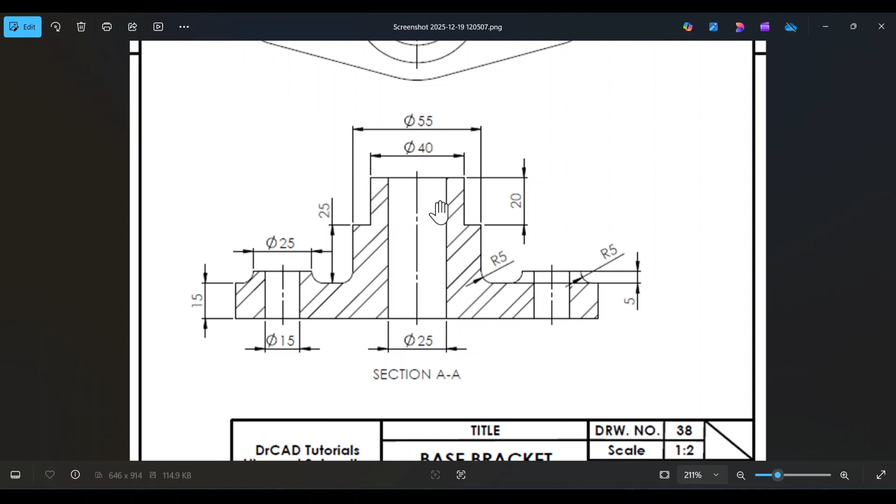Here we see the schematic drawing for exercise number 38. All dimensions are in millimeters. We have the isometric view, the top view, and the section view, and this section view was taken along this horizontal line here, this section A-A.

We have a question, and the question reads: what is the mass of this part in grams? It's telling us to use AISI 1020 steel. When we've completed designing the part, we need to assign a material, and the material is AISI 1020 steel.

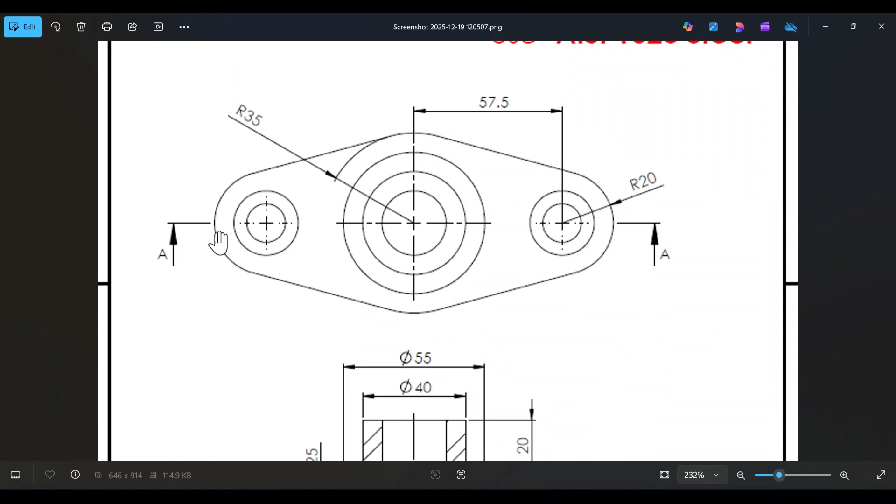Looking at the features for the components, we see that overall it's a relatively simple part to design. We have a base plate - here we see the profile of this base plate. We have a central boss, a stepped central boss. We have two bosses here at the side that correspond to the mounting holes for the component, and we have a central opening running along the center of the component.

Of course, in designing this part, we're going to follow a feature-based approach. Each and every feature that we see for this component, we're going to be implementing within SolidWorks. But for the most part, we're going to be using the sketch tools, namely the line tool, the circle tool, the smart dimension tool, and the trim tool.

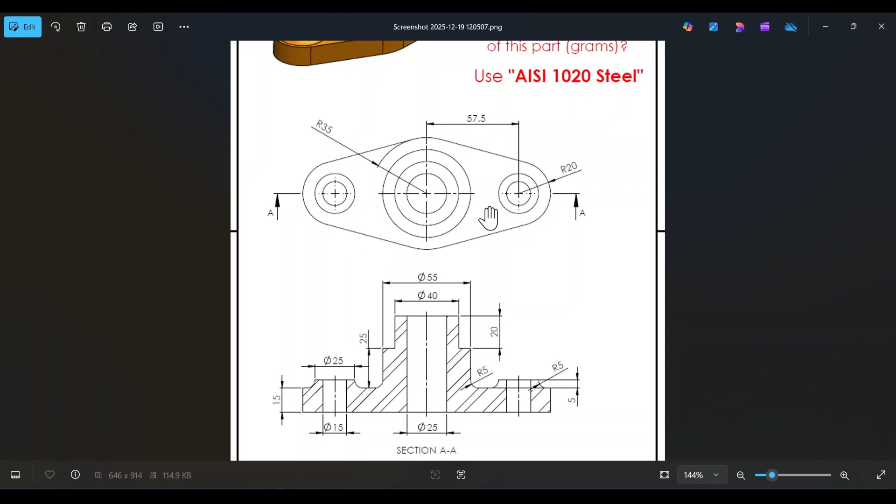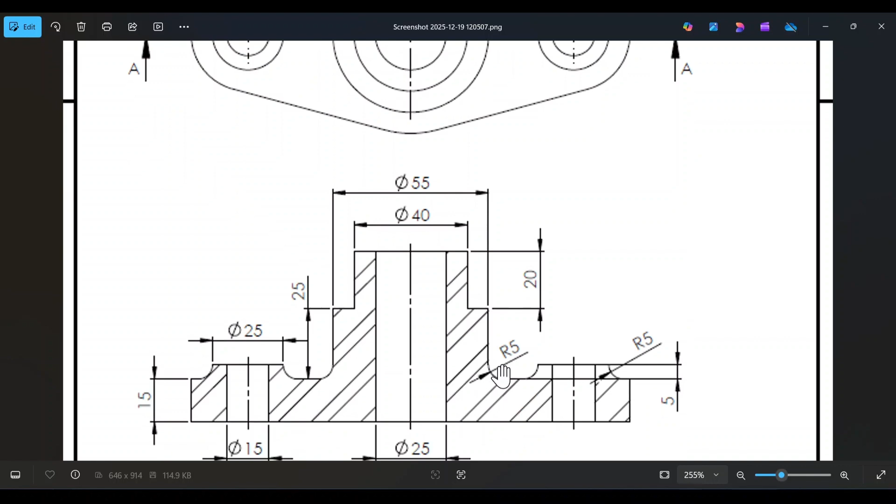Of course, we're also going to be using the extrude boss base tool and the extrude cut tool, but also for certain edges - especially edges right here, 3 edges actually, between the base plate and the bosses that we have here at the top face - we're going to be using the fillet tool to round out certain edges. And the fillet radius here, we see that it's 5 millimeters.

So this is, again, a very, very simple problem within SolidWorks. With that aside, let's get started with exercise number 38.

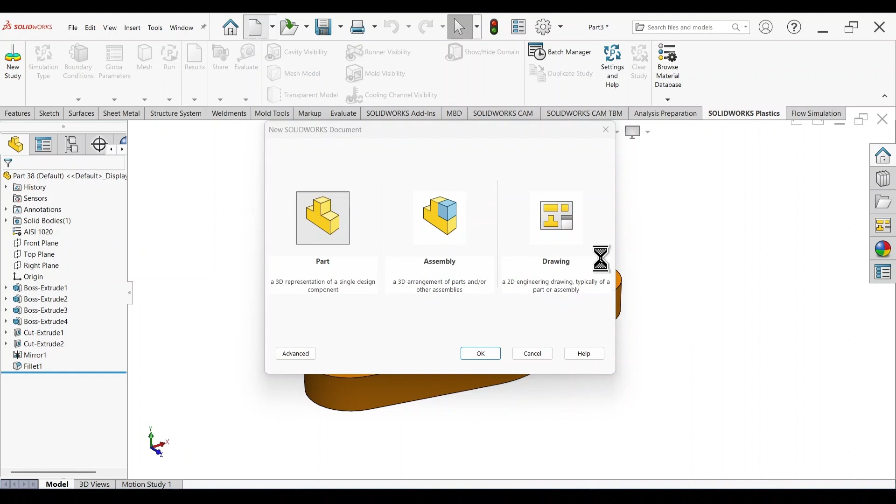Okay, so we start by creating a new SolidWorks part. We set the background to plain white, and we copy exercise number 38 into SolidWorks.

As I said previously, step number 1 involves sketching out the base profile for the component. So very simply, select the top plane, sketch, select circle, and from the origin here, draw a larger circle. Then move and draw a circle to the right of this larger circle. Set the relation between the centers of these two circles as horizontal.

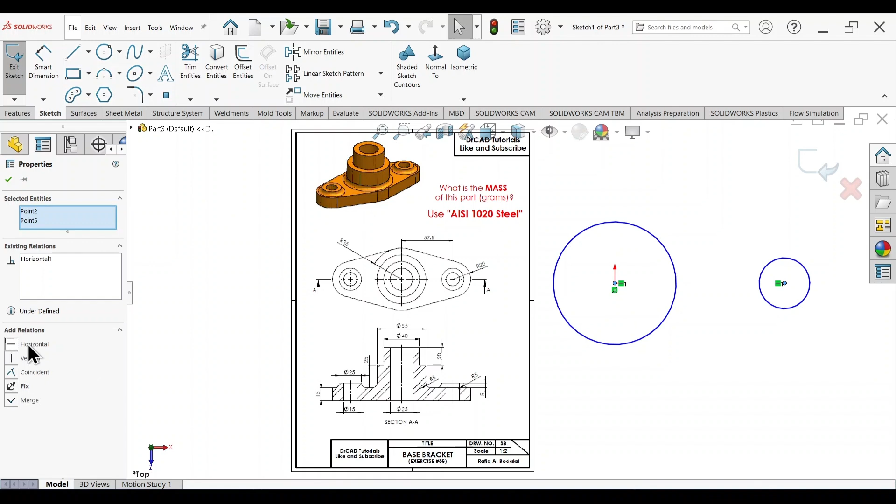Now these two circles, the big circle and the smaller circle here, correspond to what we see here for the base profile. Select smart dimension, and we see that the diameter of this larger circle should be 70, since we have a radius of 35.

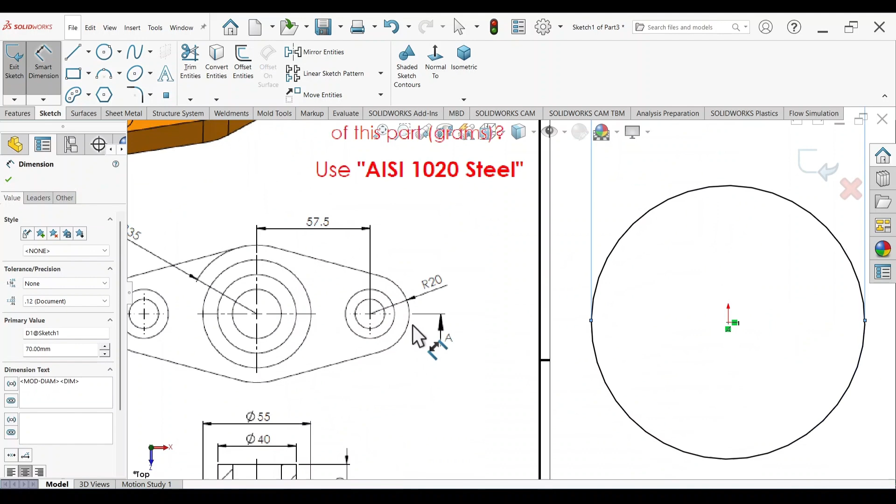So the diameter of this circle should be 70 millimeters, and the diameter of this smaller circle here should be 40 millimeters. The distance between the two circles should be 57.5 - the distance between this point and this point is 57.5.

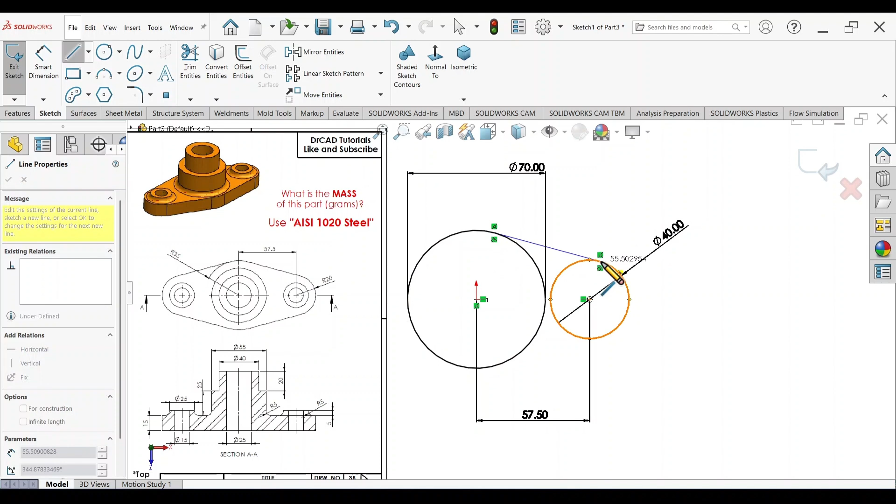Now select line, and very simply just close off the sketch that we created using 2 tangent lines, that's 1 and 2. To make sure that these lines are actually tangent with respect to their circles, we just look at the relation tags, and here we don't have a tangency condition. So select this circle and set the relation as tangent. The rest of the lines are okay.

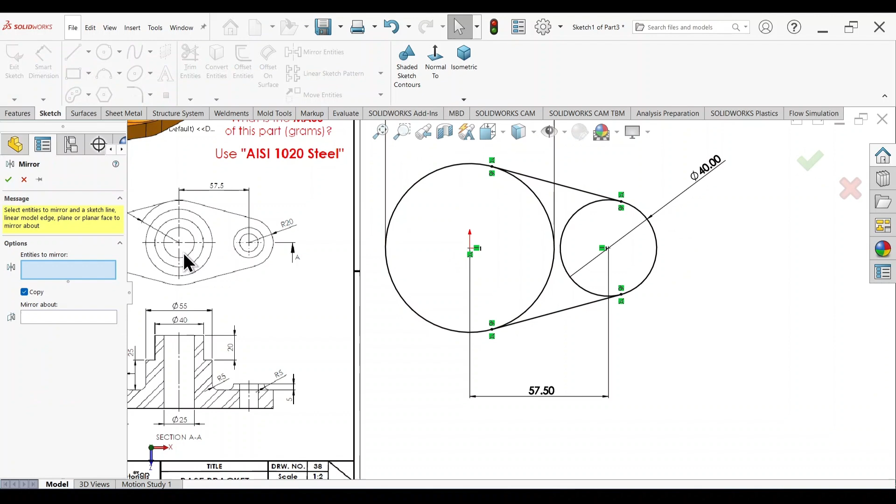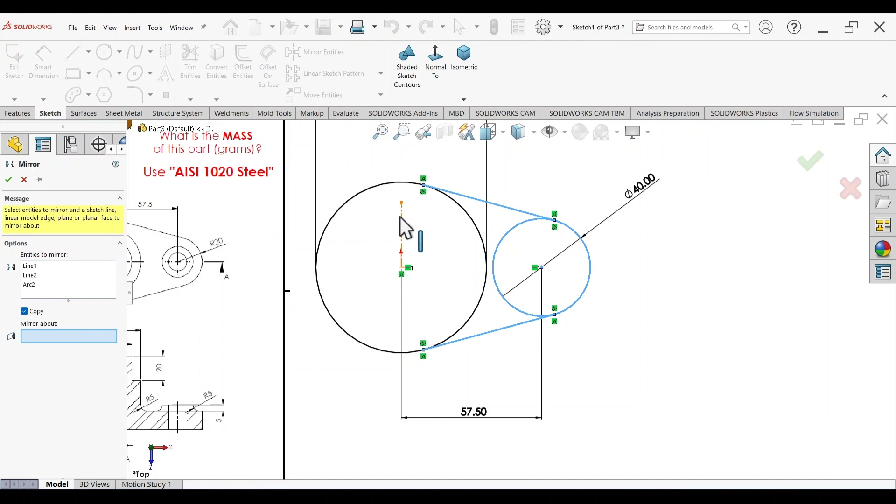Now simply just select mirror entities, and here it's asking for the entities to mirror. Select these 2 lines in addition to the smaller circle here. Or actually before that, first draw a line here, a center line starting from the origin, a vertical center line. Now select mirror entities and select these 2 lines and this circle, mirror about this vertical line that I just created, and then select OK.

Select trim entities and delete any extra lines. And here we have the profile for the base of the component. Now, very simply, just press S on your keyboard, extrude.

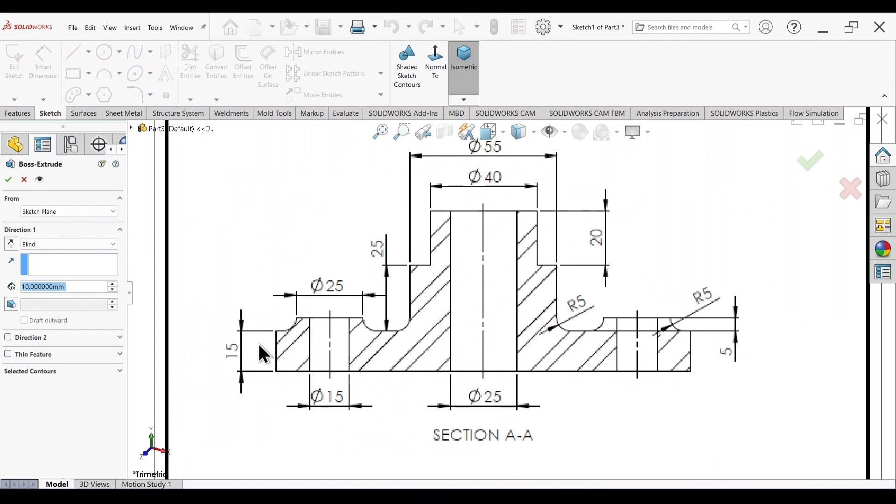According to the figure, we're going to extrude this to a thickness of 15 millimeters, as shown in the section view for the component. So enter a thickness of 15 millimeters and select OK. That creates the base profile for the component.

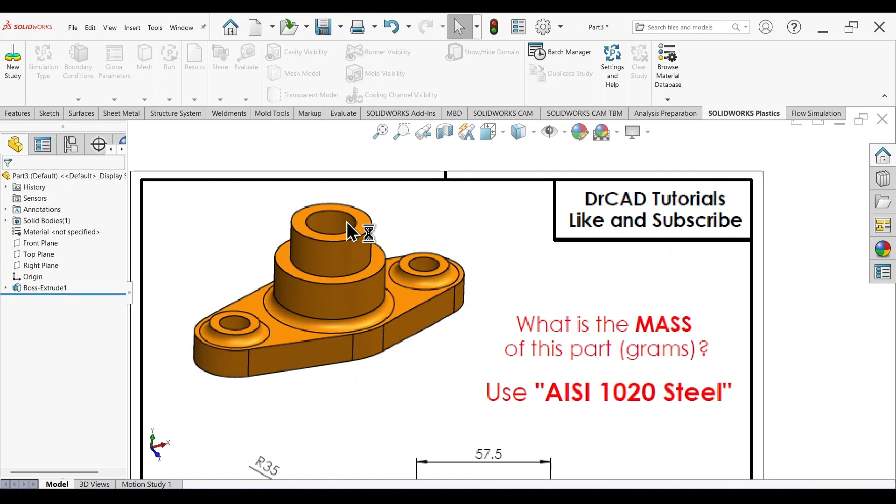Now we're going to work on creating this central boss bracket. We see there are 2 concentric cylinders on top of each other. Select this face, sketch, select circle, and from the origin draw a circle. The base of this larger cylinder should have a diameter of 55 millimeters, so select Smart Dimension and assign a diameter of 55 millimeters.

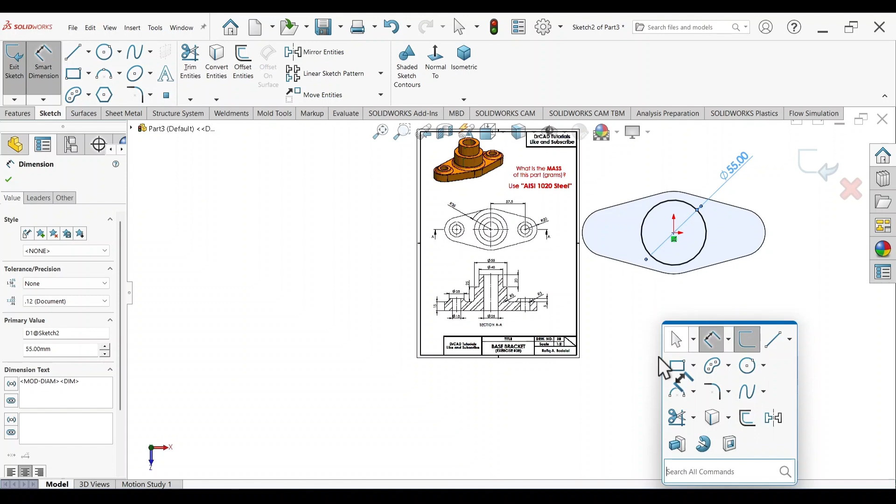Press S on your keyboard, extrude, and the height of this first cylinder, according to the figure, should be 25 millimeters. So this should be extruded to a height of 25 millimeters.

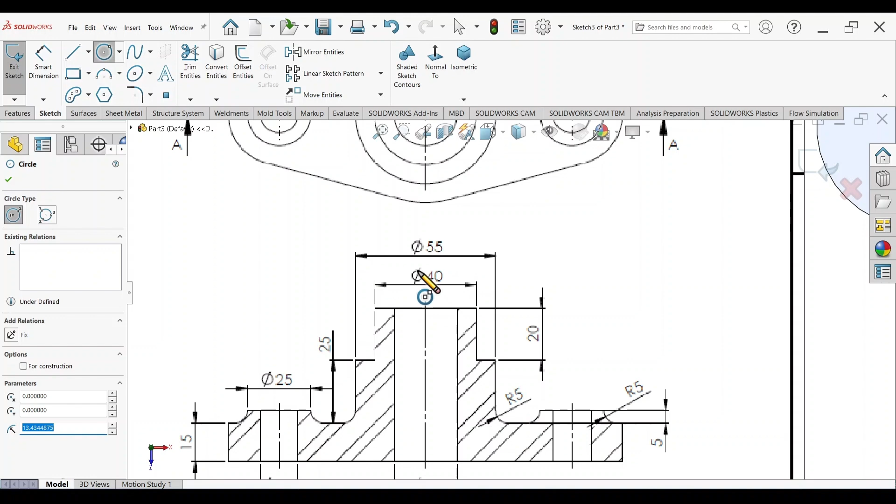Now we're going to work on creating this second cylinder. Select this top face, sketch, select circle, and from the origin again draw a circle. The diameter of this second cylinder should be 40 millimeters, so select Smart Dimension and assign 40 millimeters. Press S on your keyboard, select Smart, Extrude Boss Base, and we're going to extrude this to a height of 20 millimeters.

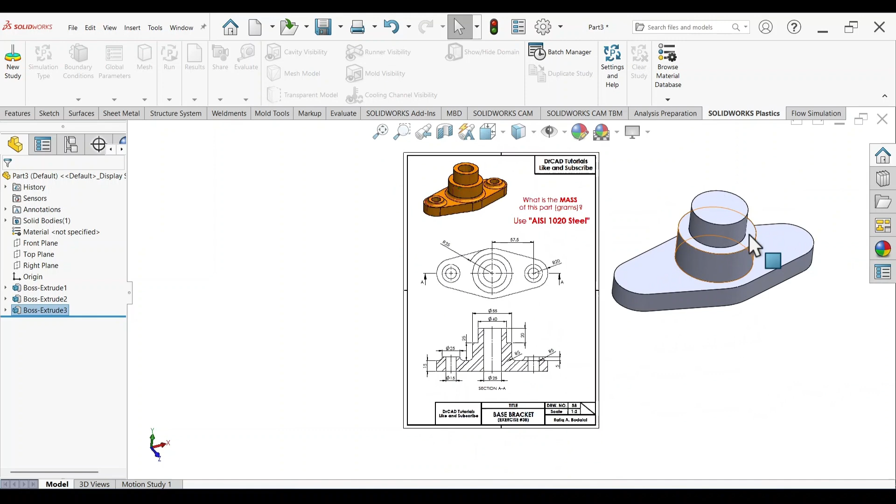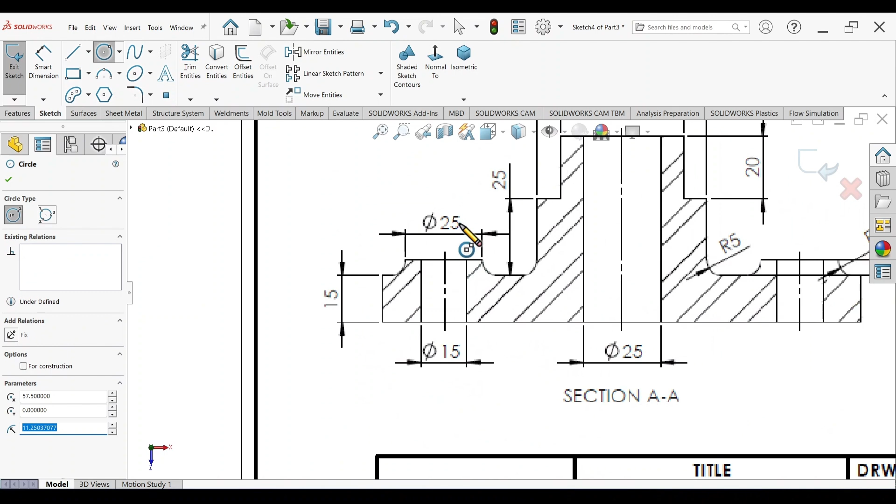That creates the central boss here, the central step boss. Now we're going to work on creating the two bosses for the mounting holes at the two sides. Select this top face, sketch, select circle, and draw two circles, 1 and 2. We see a diameter of 25 millimeters, so assign a diameter for these two circles as 25 millimeters.

Press S on your keyboard, extrude, and we're going to extrude these two circles to a thickness of 5 millimeters, and click OK.

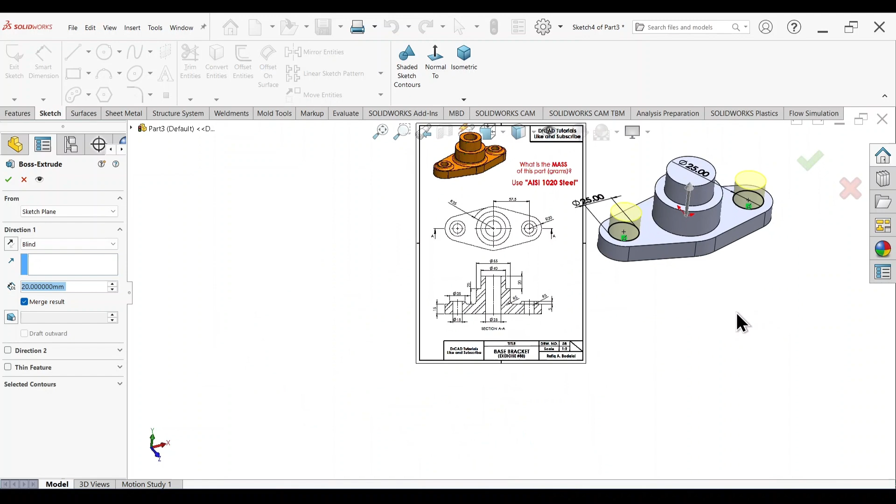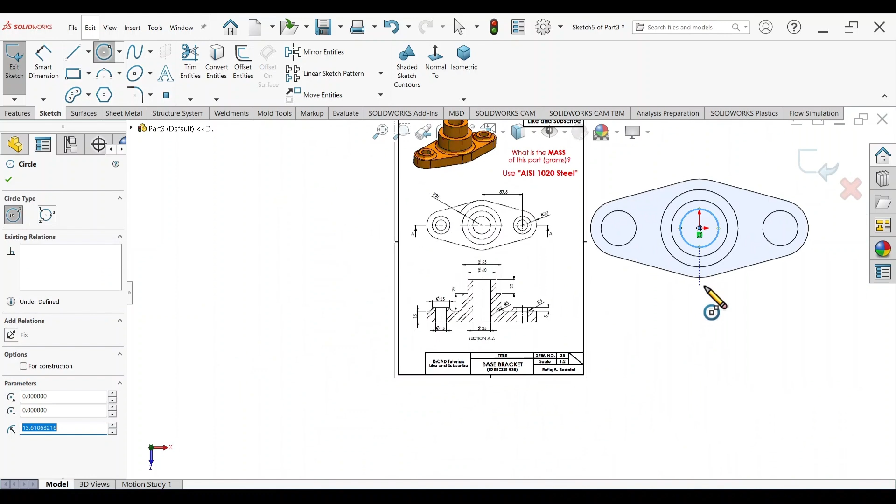Now, very simply, we're going to create the holes for the component. We have two mounting holes to the sides, and a central hole that goes all the way through the component. Select this top face, sketch, select circle, and from the origin draw a circle. The hole should have a diameter of 25 millimeters, so select Smart Dimension and assign a diameter of 25 millimeters.

Press S on your keyboard, select Extrude Cut, set the end condition as through all both directions. You can do that by clicking on this drop-down menu, or to save time, right-click on your mouse and select through all both directions, then select OK.

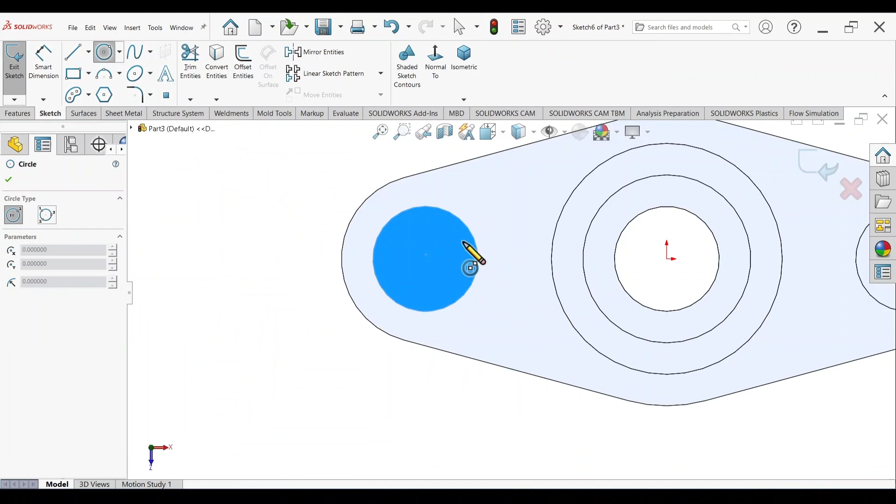Repeat the same process here. Select this face, sketch, draw a circle, starting from this center point. The circle should have a diameter of 15 millimeters, so activate the Smart Dimension tool and set this to 15. Press S on your keyboard, Extrude Cut, set the end condition as through all both directions, then select OK.

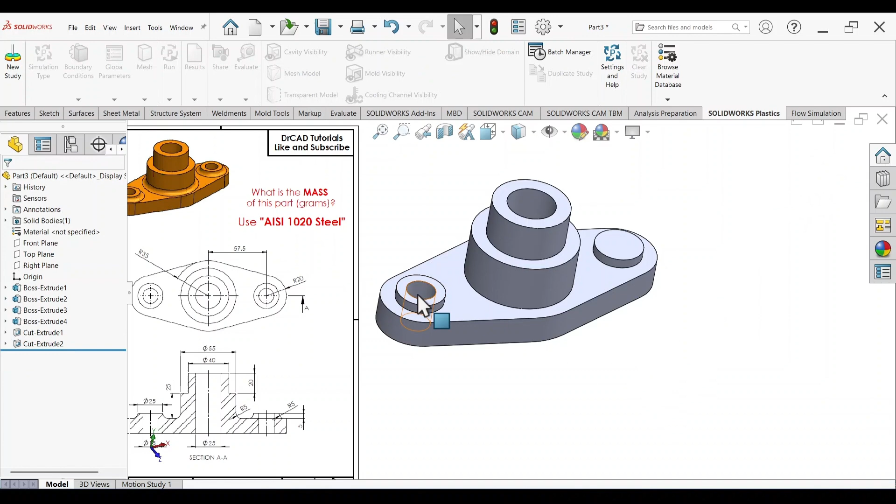Now we need to mirror this to the other side, so go to Features, Mirror, and it's going to ask you for the face or plane you want to mirror along. Simply select the right plane, and for the features to mirror, select this internal face, then select OK.

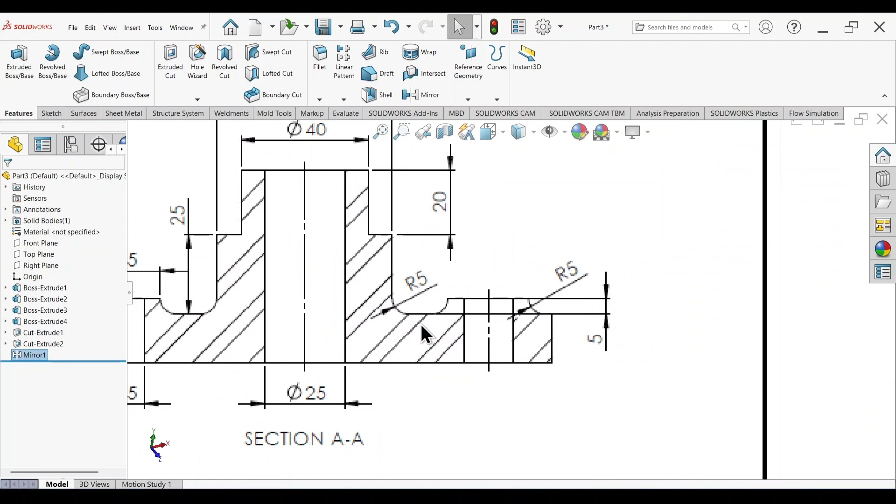Finally, we have certain edges we need to fillet out, specifically using a fillet radius of 5 millimeters. Select the fillet tool, and we're going to fillet these edges 1, 2, and 3, assign a fillet radius of 5 millimeters, and then select OK.

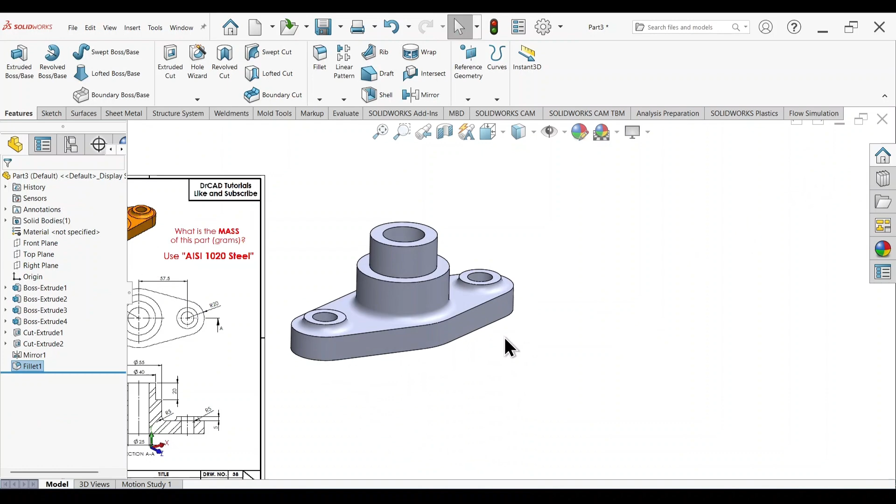Now, again, we need to answer this question: what is the mass of this part in grams? Before that, we need to assign a material of AISI 1020 steel. To do that, right-click here, Edit Material, select AISI 1020, Apply, Close.

Delete this image, and now for the moment of truth, we need to determine the mass of this part. Select the Evaluate tab, then select Mass Properties. And your final answer here is 1,356.99, or more simply, rounding up, 1,357 grams. That is our final answer.